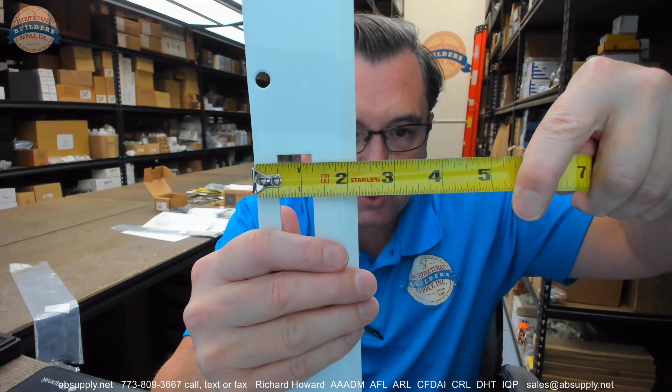Overall length, 18 inch. The overall width of the strike is about 2 1/4. Now, these strikes are measured from the center line of the screw hole, which is generally, not always, but generally the center line of the prep as well, to the edge of the lip. If what we're saying is that screw hole preparation is the center of this prep, that's generally going to be considered the center of the thickness of the door when the door is in the closed position. And that is how strikes are measured, which is the center line to the edge of the lip. So the center line to the edge of the lip on this strike is about 1 3/8.

That's pretty typical. 1 1/4 is by far the Swiss Army knife size of strike plate lip lengths. So when they measure strikes, it's the center line of that mounting screw to the edge of the lip.

That's what you use to determine, in part, if this is the correct strike for you. If the lip length is too short, it's not correct at all. If the lip length is too long, it's certainly not ideal of a strike preparation, that's to be sure. You don't want projecting hardware hanging off.

I just had a client a couple of days ago order, and we went through all the math on determining what length of strike lip that he needed, and it was determined 1 3/4 because he had about an extra 1/2 inch of material. But the client received the strikes and said they were 1/4 inch too long, and we were never able to get to the root of how the original calculation was incorrect, but he simply wanted them tucked back further away from projecting into the opening.

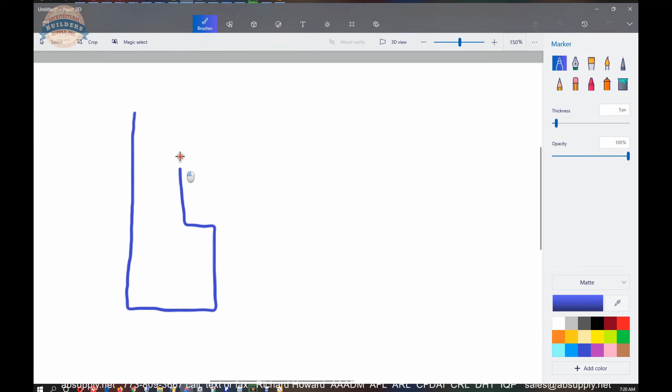So in a normal or a typical installation, you're going to have a frame. Let's just imagine that this is a single rabbet frame. It can be double rabbet, whatever. And you're going to have some pretty typical wall construction that's going to occur here. Your studs will fit back behind.

Poor artistic skills aside. Okay, a couple of studs, whatever wall treatment you're going to have here, whatever the construction's going to be. You've got some casing, you've got some wall situation here as well. Well, here's your strike, okay, that's going to come down.

Hopefully you get the concept. Okay, here's your strike. So you've got holes, you've got your preparation for your bolt in here. And if you recall, that's where the center line of those screws were. The other screw holes were back over here.

Now, the reason that they are two different lengths is so that when you install the screws that would otherwise sit here, they're not very long. They're possibly 1 inch long, or well, let's take a look. Yeah, they're 1 inch long. The longer screws, and they're probably a number 12, the longer screws appear to be they might be a number 10 or an 8, and they're 3 inch long. The short screws are going to fit inside of here.

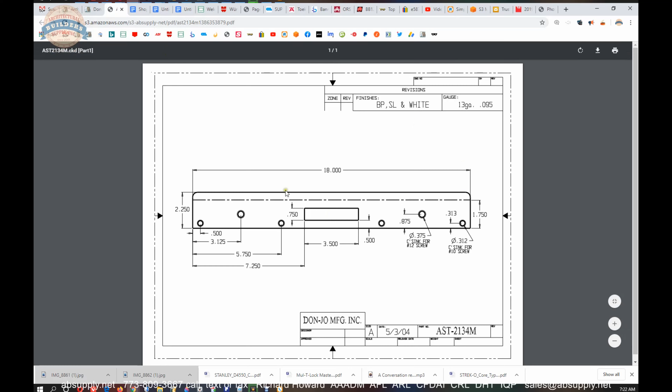So that's your technical drawing of the item. Then we get to the product catalog, and that's what's going to allow us to see the other options. So if you'll copy this part number and then carry it over and do a find function on your keyboard, Control F, you'll get to the table where you can find all of these different strike preps.

Okay, the AST 2134M mortise hole version with universal center hole. So, having said that, 1 hole, 2 hole, 2 hole at different centers, and then 1 larger hole. Well, the reason that hole is larger is because it's meant for a mortise. If you had a mortise lock on your door, mortise locks are going to, when you have a regular latch bolt, okay, and then you have a deadbolt up above, you need to know the center to center of those.

What's that dimension? Well, with a mortise lock, you're going to have in the edge the deadbolt, maybe an auxiliary latch, and then you're going to have the latch bolt itself. And the concept of that 3.5 inch tall hole is for you to fit all of that in there. Now, whether or not you will, I can't tell you, I don't know what lock you have. But that's the idea, that all of that, the latch, this guarded portion is not going to work at all with this installation, this auxiliary deadlocking latch.

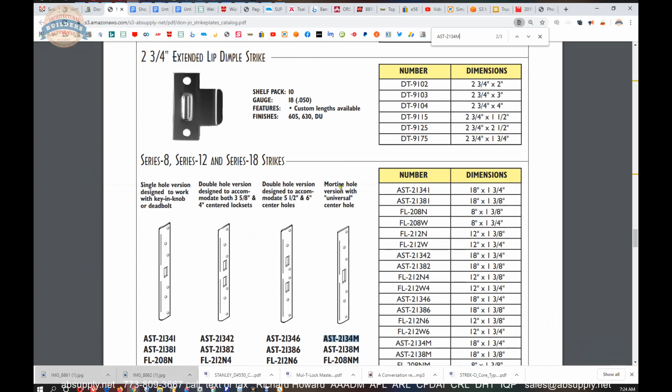Some lock manufacturers have it down below your lock, but then that's where your stop works would be if you had those. So you'll have to measure and determine how well that's going to lay out. The dead latching feature is a small trigger in the edge of the lock that you want to have fully depressed when you install the lock, because that will keep the latch bolt from being blocked. Okay, so that's the idea of the mortise hole version with universal center hole.

Will this work for you? Can't say. Do you have the data to determine if it will? Absolutely. You've got that technical drawing there that will tell you the overall height.

Okay, so hopefully that will get you to that point. So the 2134 is an 18 by 1 3/4.

Now, I'm not really sure what they're referring to with 1 3/4. There's nothing on here that's 1 3/4, except what they're trying to tell you is it's for a 1 3/4 thick door. It happens to have a standard, or relatively standard, lip length. If you have a 1 3/8 door, you use the 2138M, and you can see the other variants of what they have here.

An 8 inch version and a 12 inch version with the universal center hole. They have the standard single latch hole, and then the deadbolt and latch in a 3 5/8 or 4-inch, and a 5.5 or 6-inch version here. Different finishes are mentioned down here.

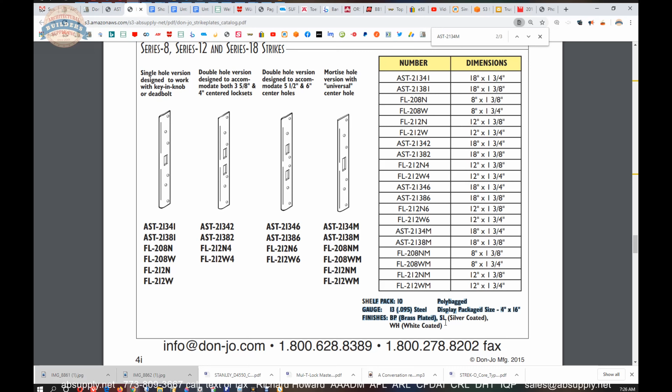Now, why would you need such a long strike plate? Well, you've got some damage. You have maybe a kick-in and part of the frame has been substantially damaged. The concept with a longer strike and a piece of steel is that you can chisel away or remove all the damaged components and then replace both of your strikes, likely, with one long piece of steel. So it's not only a way to reasonably upgrade what you have, but also a way to repair some potential damage as well.

Removing the doors is one thing. Removing a door and a frame can be a different chore altogether.

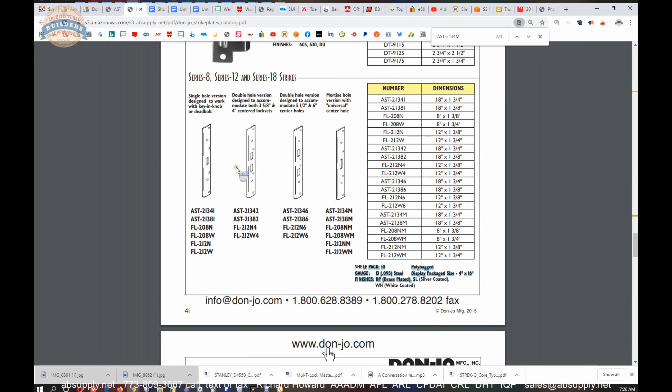So that's that table. Now the rest of the product catalog is going to allow you to go through all of the strike plates offered by Don-Jo, and I won't go through all of them except to say that they have a complete offering of strike plates. Extended lip versions, different security strike versions.

This BX2 SDS is a good strike for deadbolts if you want to reinforce your deadbolt installation. It's other security options where they get those screws back into the studs, as I had mentioned earlier. Okay, adjustable.

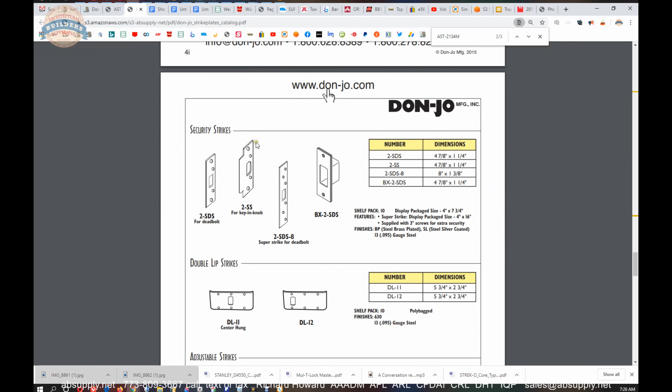T-strike and 4 7/8 ASA strike. Thimble strikes, if you're drilling, if you need to add a deadbolt to a steel frame and you can't prep that correctly, you can drill a round hole and use a thimble strike.

Finally, they can custom manufacture strikes. I find that it's awfully expensive to do that in a small quantity, but nonetheless, they have the capability of doing it.

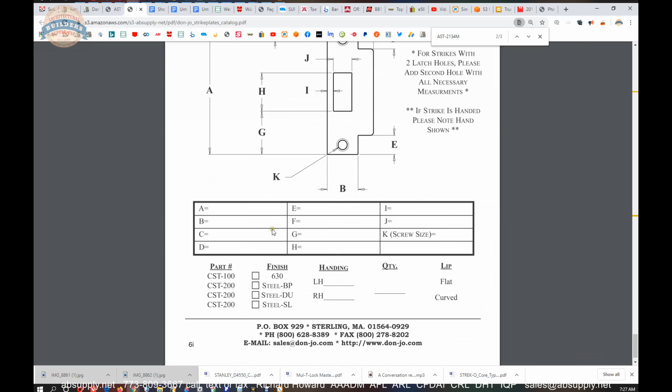All of the subsections of the full product catalog are here, so you don't have to go through that large, unwieldy catalog. So if you wanted to look just at strike plates, there they are. Or reinforcing wraparound plates, there they are. Latch protectors, there they are. If you know Don-Jo, the name, you probably know them for the latch protectors and wraparound plates.